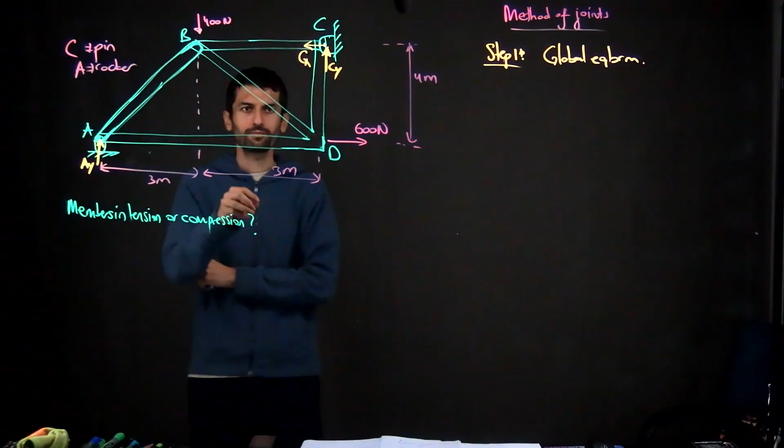Okay, so we have a similar truss problem again. There is a pin at point C and a rocker at point A. The rocker will have a normal reaction force, and the pin will have support reactions in the X and Y directions. And then the question says that...

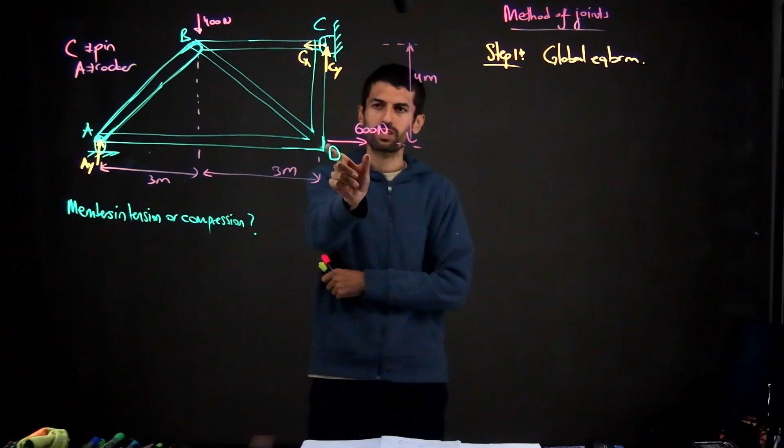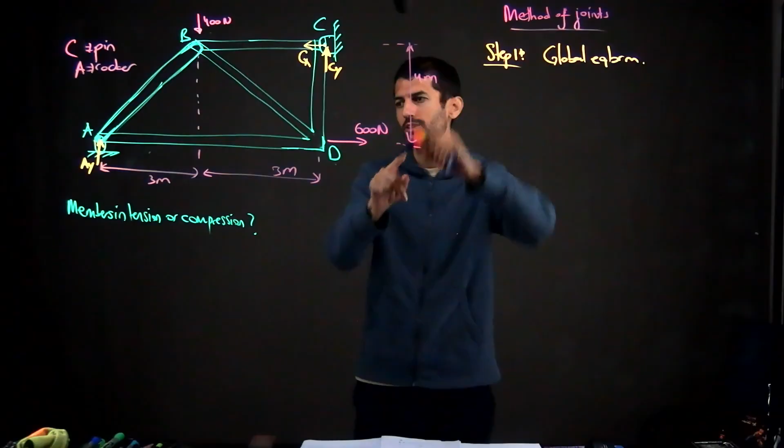Again, what are the members, are each of them in tension or compression. We have an additional force of 600 newtons this way at point D, and then we have 400 newtons load at point B. The length of D to C is 4 meters, the length from A to B is 3 meters, again 3 meters from B to D.

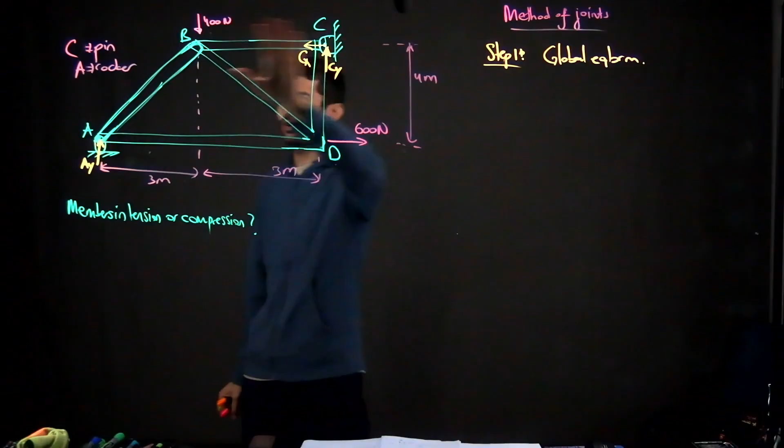So step 1, as always, will be the global equilibrium. We'll write the equilibrium equations for the whole setup, and then we will write the equilibrium equations for each of the joints. Okay, so let's do that.

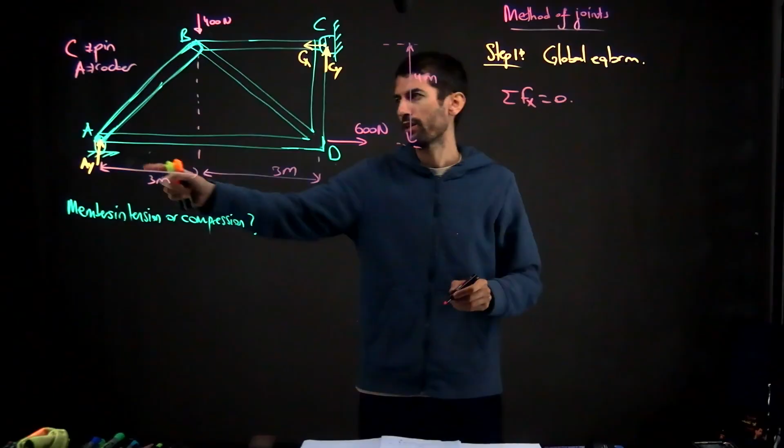So first, the x direction forces. We have x direction force as Cx, which is negative. I will take this direction as positive. And then we have 600. So from here it follows that Cx is 600 newtons.

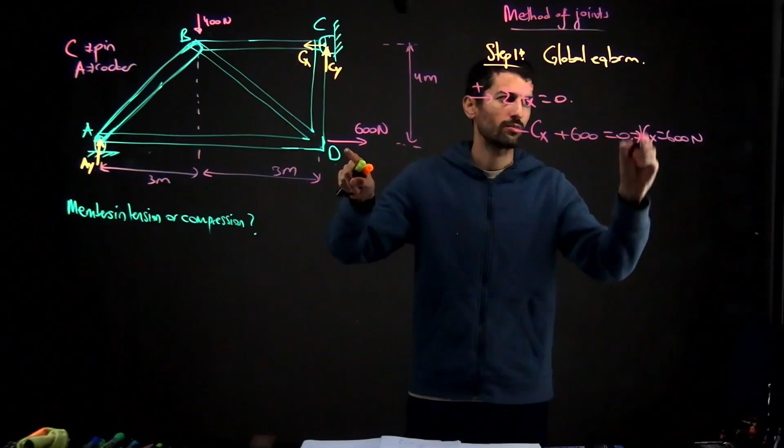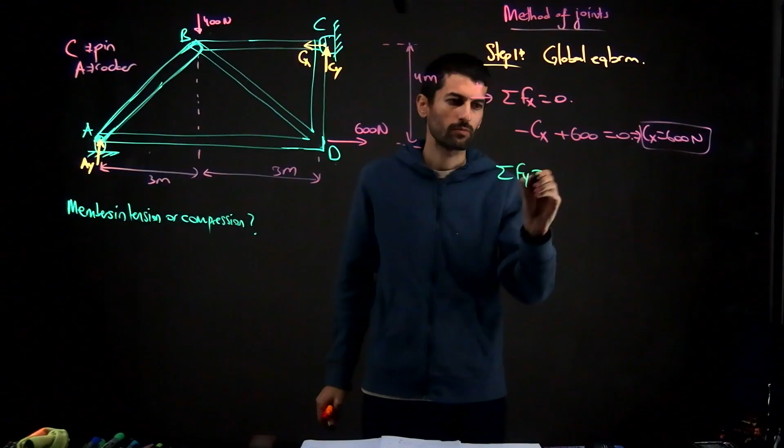And then we have the y direction forces, which is Cy. Sorry, this should be up. As positive, so we have the Cy, we have the Ay, and we have this 400. Okay, and you can see that we have two unknowns but one equation.

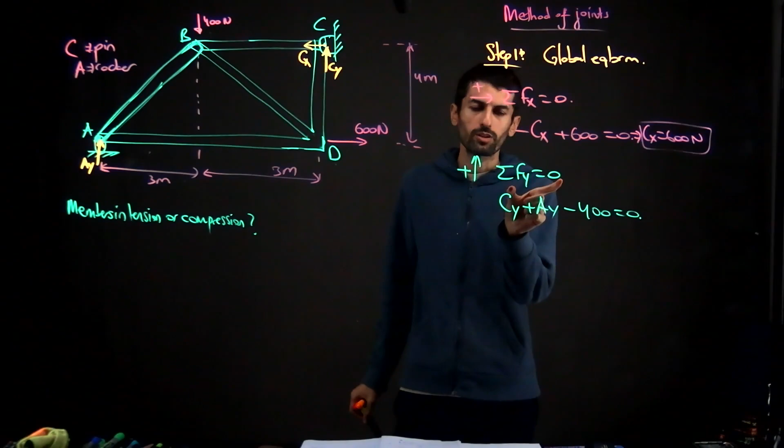So we need one more equation to find these unknowns. So that final equation will come from the equilibrium of rotation. We will say that the moment about any point is 0. So I will choose point A, but you can choose any point. Even you can choose a point outside this truss.

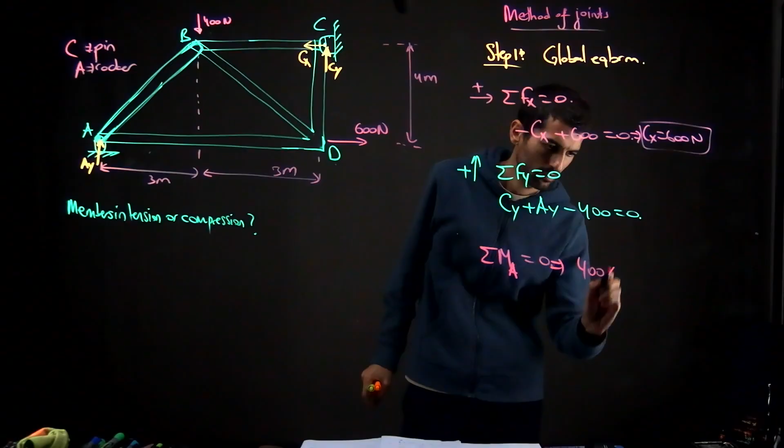So I will say that the moment about A is 0. So it means that this 400 times 3 creates a clockwise moment this way, and negative. This Cx creates a moment this way, which is a counterclockwise moment, times the arm of it, which is 4 meters.

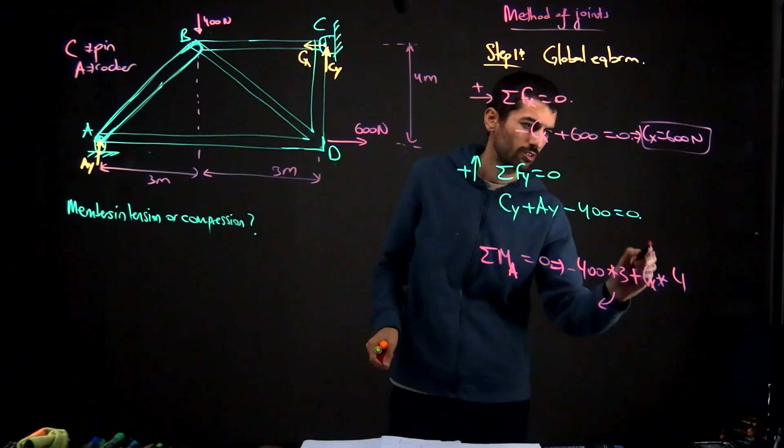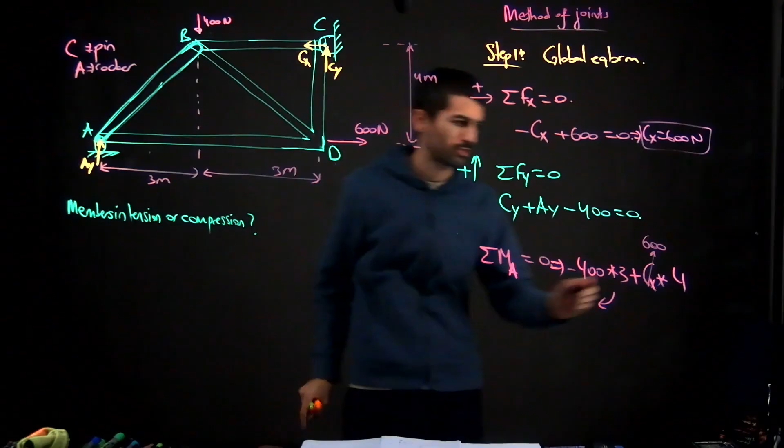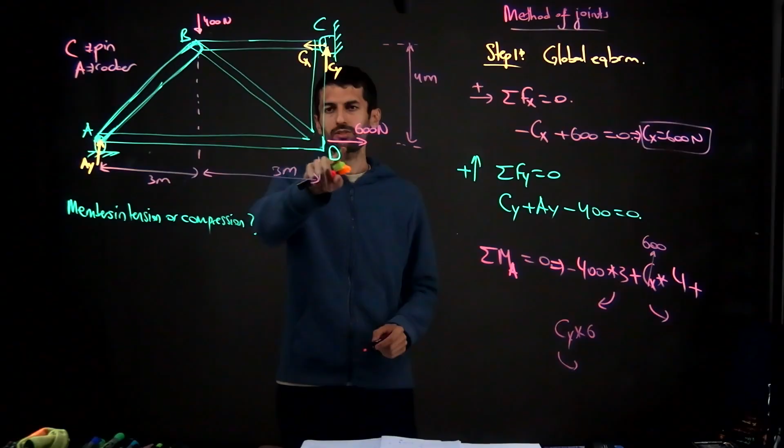Okay, and I know that Cx is 600. And then Cy creates a moment about A, again in counterclockwise sense, with an arm of 6. This one is counterclockwise, Cy times 6, again counterclockwise. And then the 600 passes through point A and it doesn't create any moment. So that will be equal to 0.

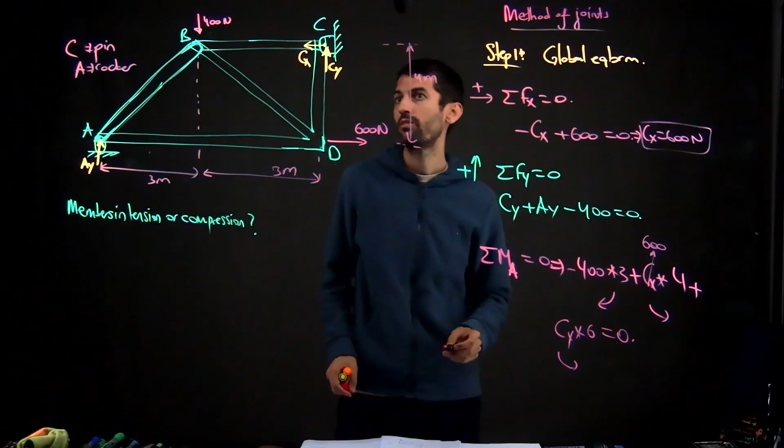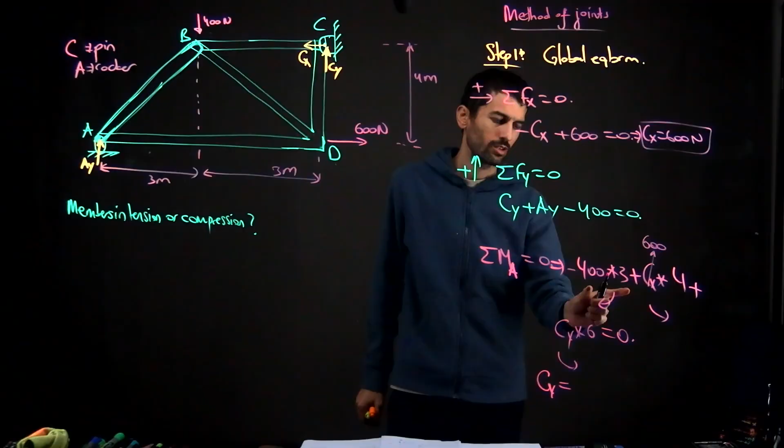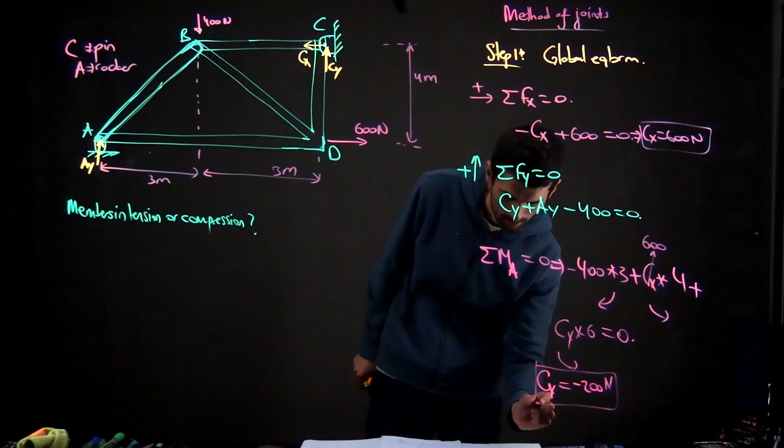So if we solve it, we will see that Cy is equal to... we have 2400 here, 1200 here, so it will be negative 1200, and so negative 200. That's for Cy. Okay, so we have the value for Cy, which is negative 200 newtons.

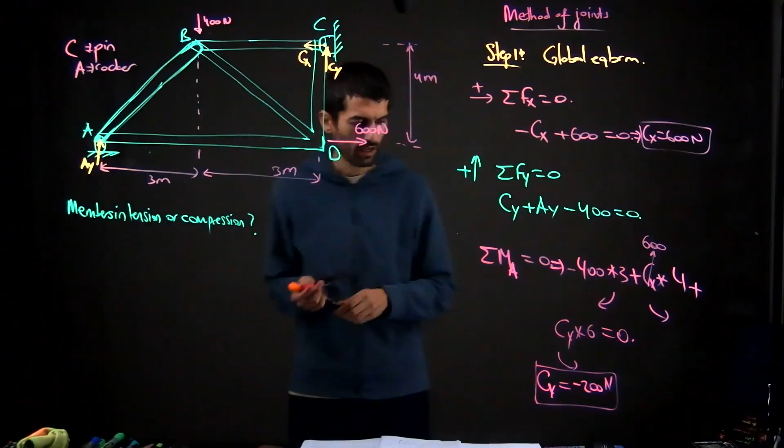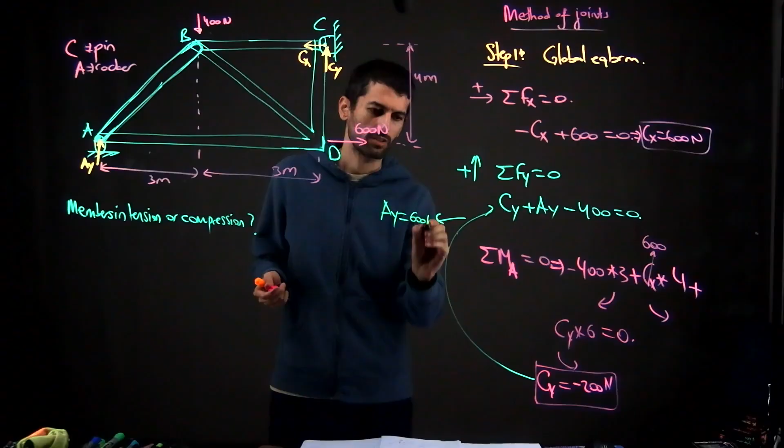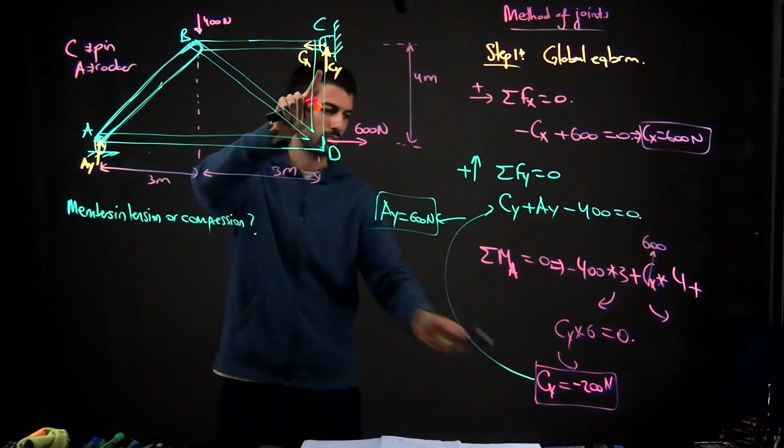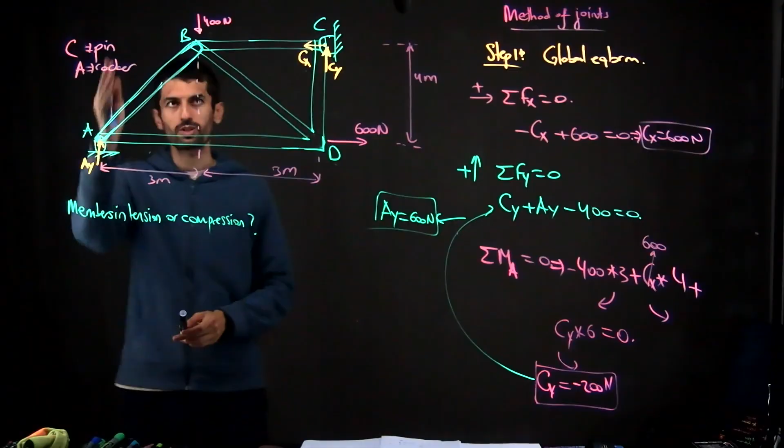Then we can go back and find the value for Ay. From here it follows that Ay is negative 200, negative 400, and 600 newtons. So the result says that the direction for Cx is correct, 600, which balances this force. The direction for Cy should be the opposite, this way, so this balances the moment by 400, and then the direction for Ay is positive, which is up. Again, this balances this 400 and then this Cy force.

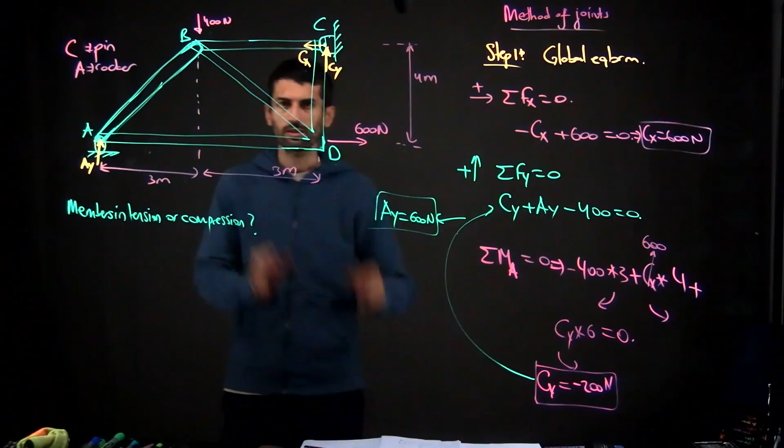Okay, so with this in mind, we finished step 1, and now it's time to move to step 2, which is to write the equilibrium equations for each of these joints. Let me write what we have found. We said that Cx is 600 newtons, Cy is negative 200 newtons, and Ay is 600 newtons.

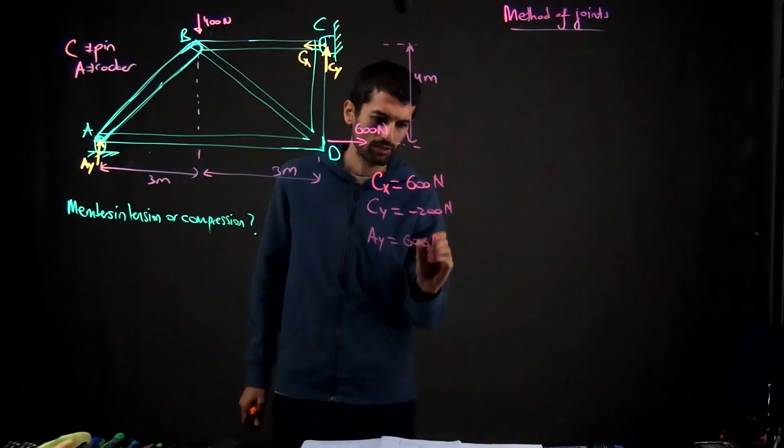Okay, so now I will start from joint A, and then B, and then C, and then D. So let's firstly go with joint A. There is a reaction force of 600 newtons. There is a force, again I will assume it is tensile force, called FAD. And there is a force, again I will assume a tensile force, called FAB. And this FAB has an angle here.

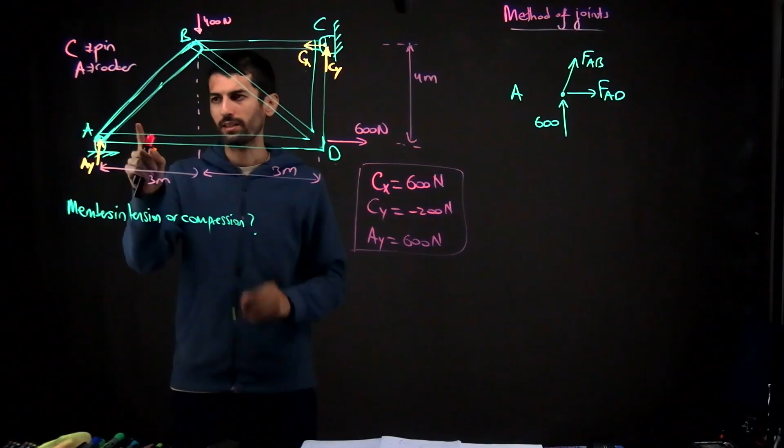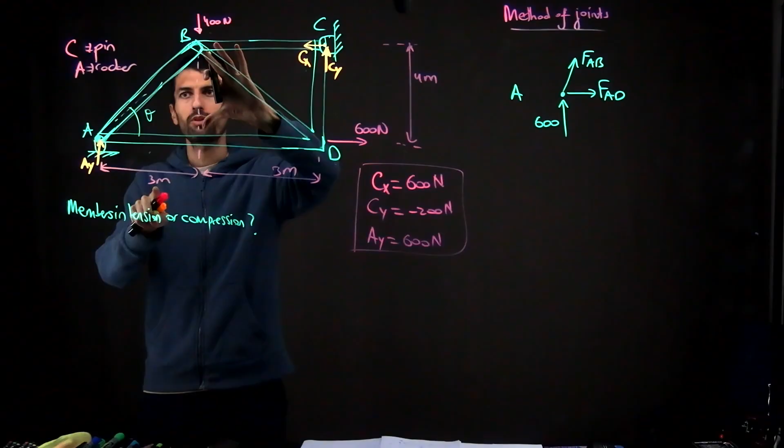This one is theta angle, and I know that this theta angle can be found by 3 meters, this one is 4, and this will be 5. A 3, 4, 5 triangle. Okay, so I can easily find it, and this theta, it will be just 3, 4, and 5, and then this will be the theta.

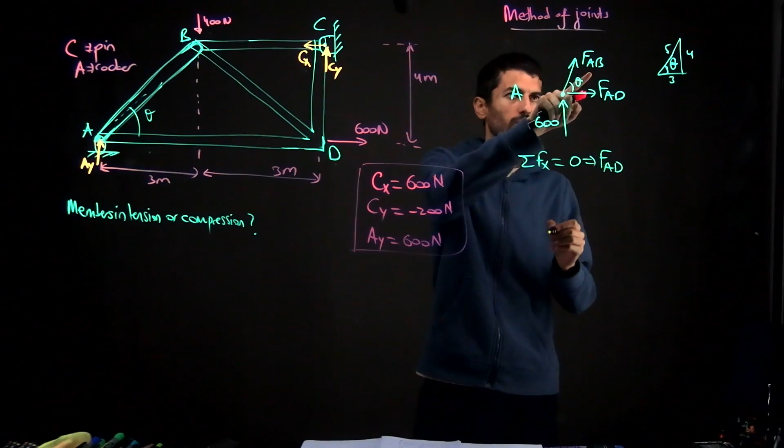Okay, so we have two unknowns, essentially two equations, so we can find the unknown ones. So I will say this one is for joint A, so this will be 0. We have the force of FAD, which is positive, and the cosine component of FAB, which is again positive. The cosine is 3 by 5, and that will be equal to 0.

Similarly, the y will be equal to 0: 600, again this one is positive, but the sine component now comes, so we'll have the FAB, sine of theta is 4 by 5, that will be 0. Okay, and then if you solve it, we will have that FAB is negative 600 times 5 by 4. That will be negative 750 newtons.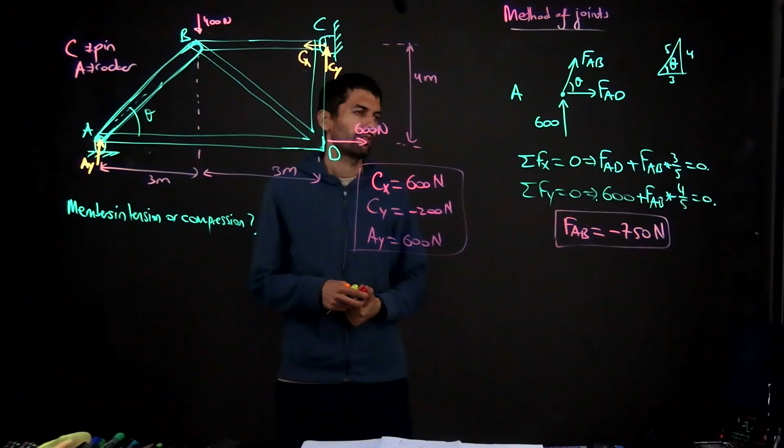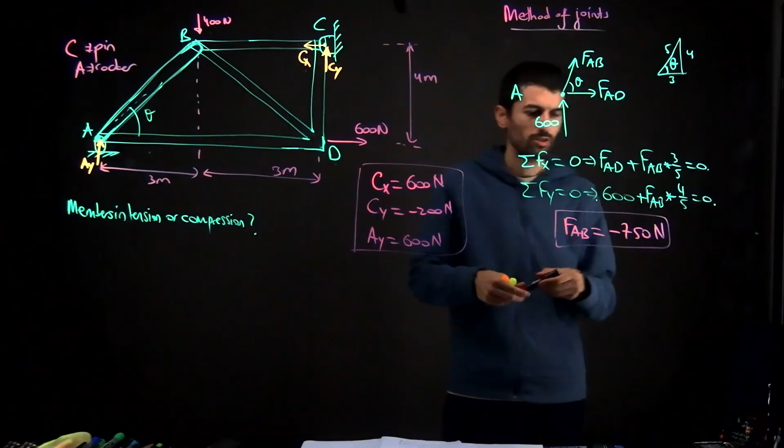That is FAB. And then we will have FAD. So this one, 3 by 5, that will be our FAD value. So this one divided by 5 makes 150, times 3 is 450. So it becomes that FAD is 450 newtons.

Okay, so the result says that the direction for FAD is correct, this way, 450, but the direction for FAB is negative, so it should be that way. It is, in other words, a compressive force acting on joint A. That force, so it will be that FAB is negative 750 newtons and FAD is 450 newtons.

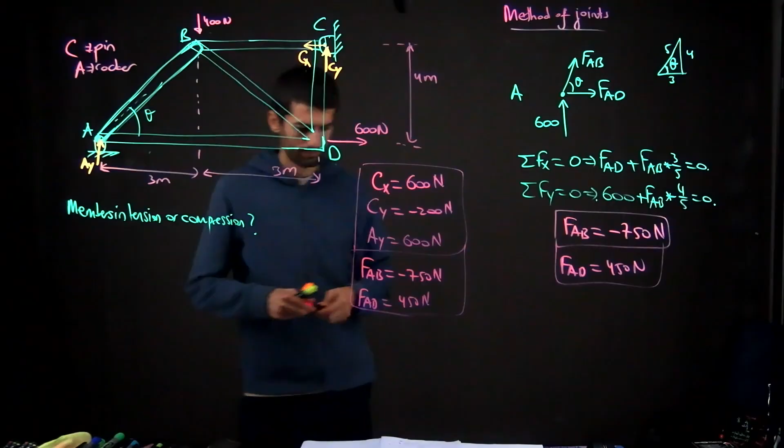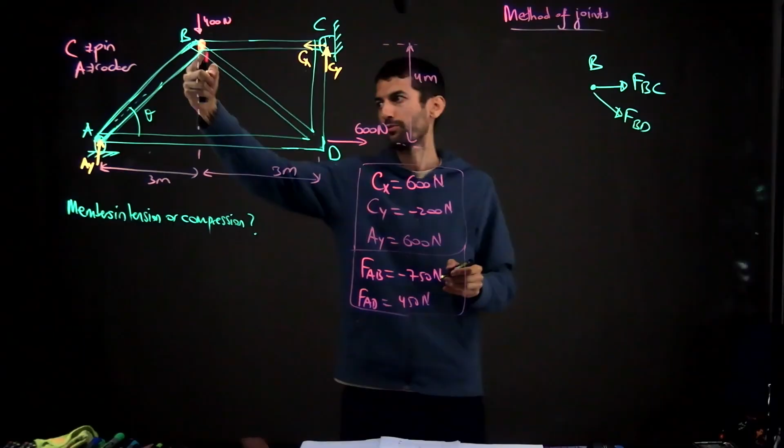Now I will move on to joint B. For joint B, we have a force BC, we have a force BD, and we have a force AB.

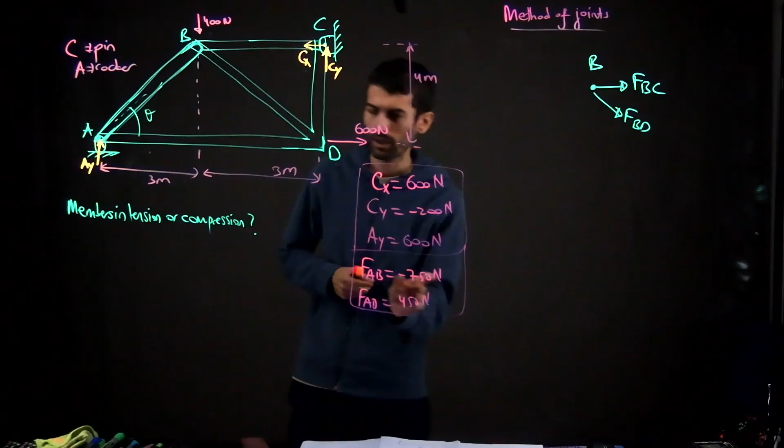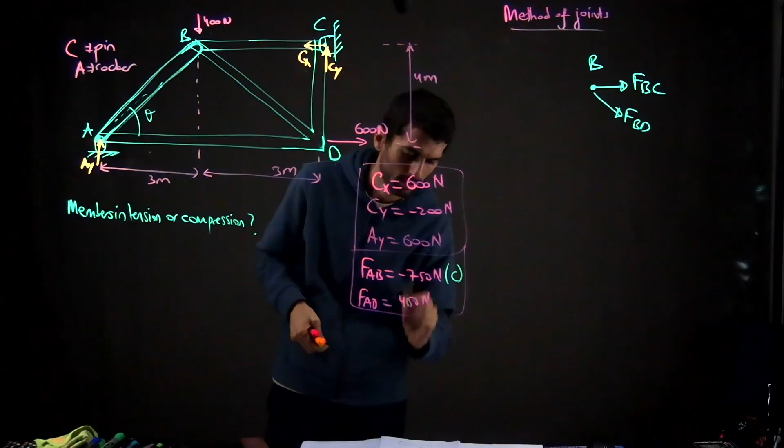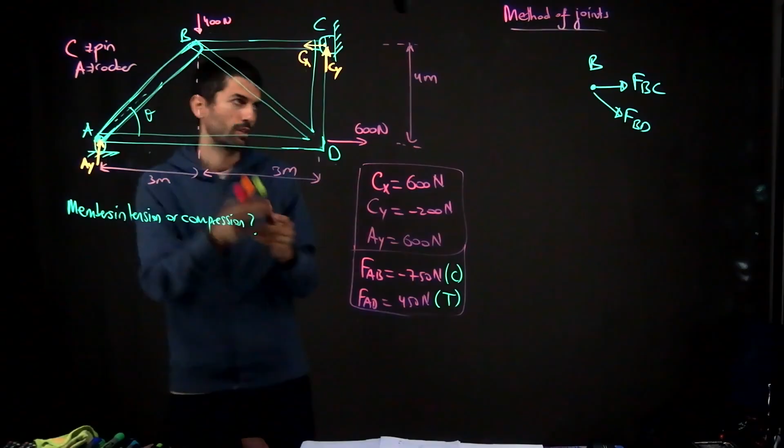And for AB, we have found that the force is not this way, but the force is that way. Okay, so since it is negative, I will put it here as compression, positive tensile. And since this one compresses A, the equal and opposite one should compress B. So I will just call this one FAB. Again, Newton's third law.

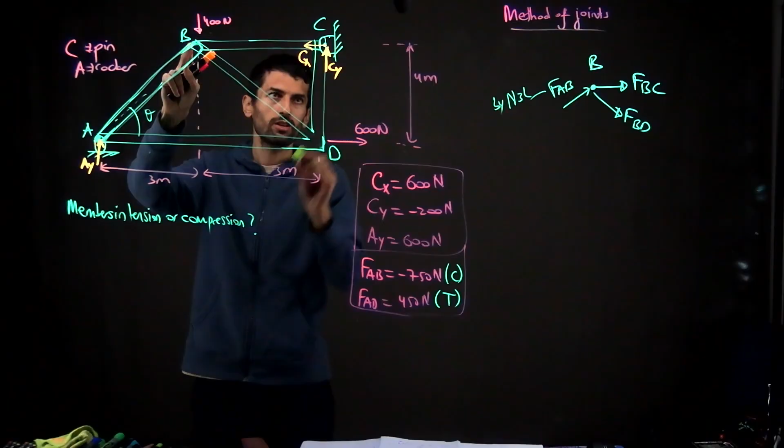For B to D, we have again 3, 4, and 5. So this is B to D, this part is 4, this part is 3, that part is 5, and that is the angle theta, same angle theta here.

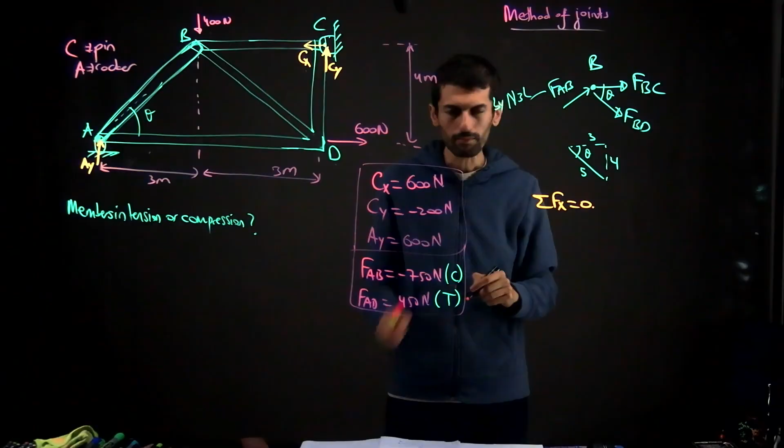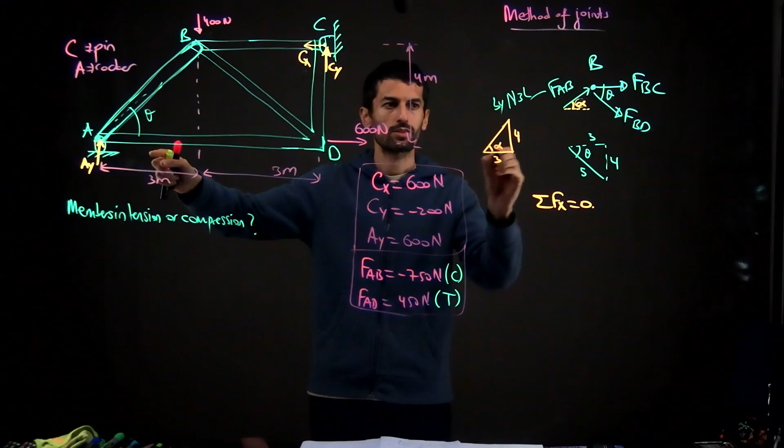Okay, let's write the forces. First the x components will be 0. The angle for FAB was theta here, so let's call it a different angle, alpha. For FAB, we had this one as 3, this one as 4, and this one as alpha. This one is for AB, and this one is for BD.

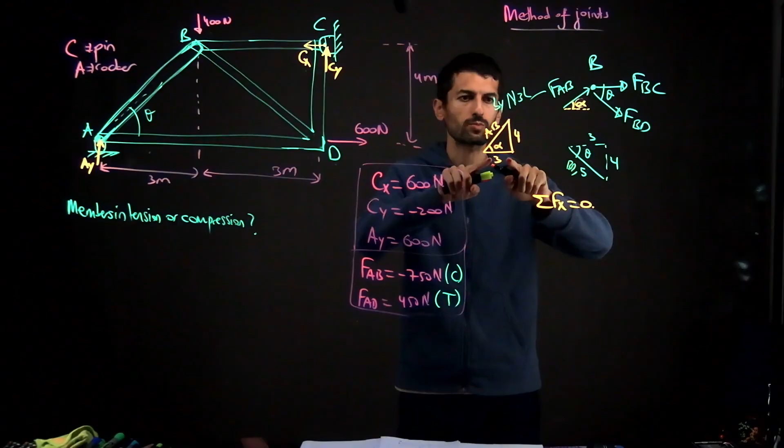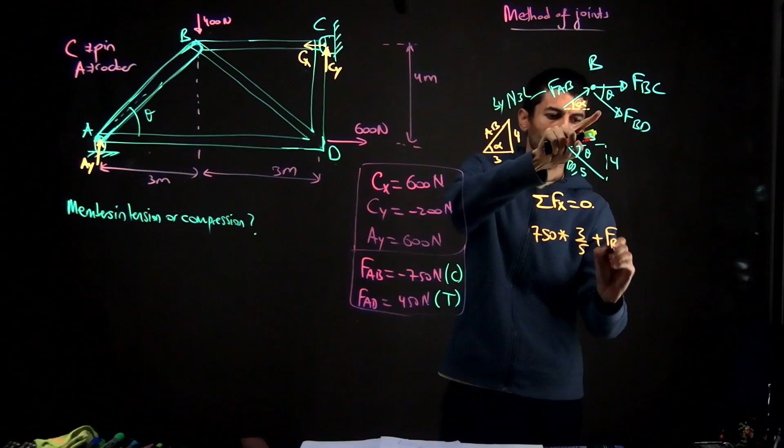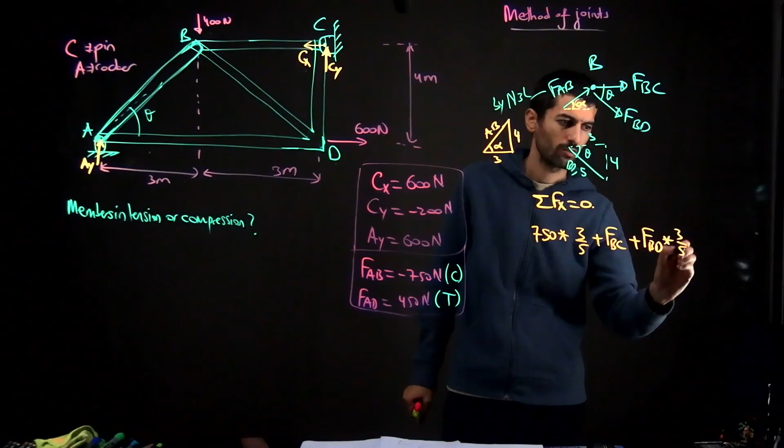X component of FAB is positive. FAB is 750, and its x component will be cosine of the angle, which is 3 by 5, plus FBC, plus FBD as a cosine component, which is positive again, so FBD cosine of theta is 3 by 5 again.

Now comes the y component, so we have two unknowns. For the y component, we have FBD and FAB only.

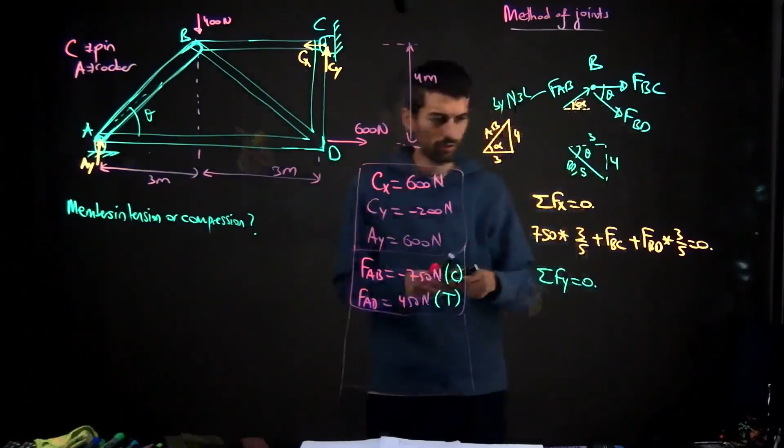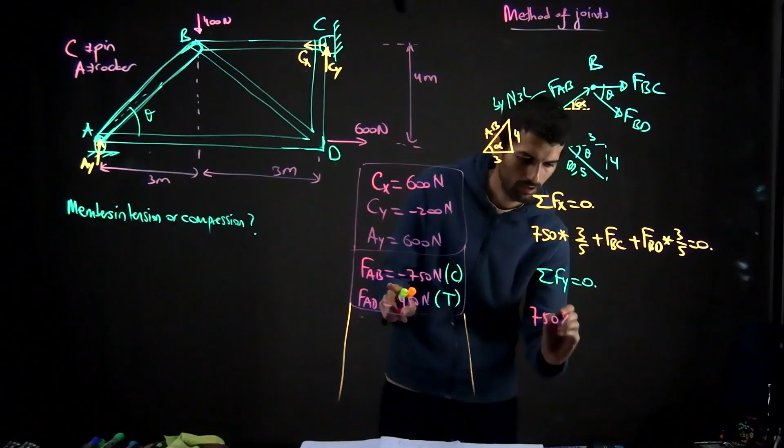For the y component forces, we will have FAB y component, 750 times the sine of the angle, which is 4 by 5, and then FBD y component, which is negative, again the sine of it, 4 by 5, and then negative 400 is equal to 0.

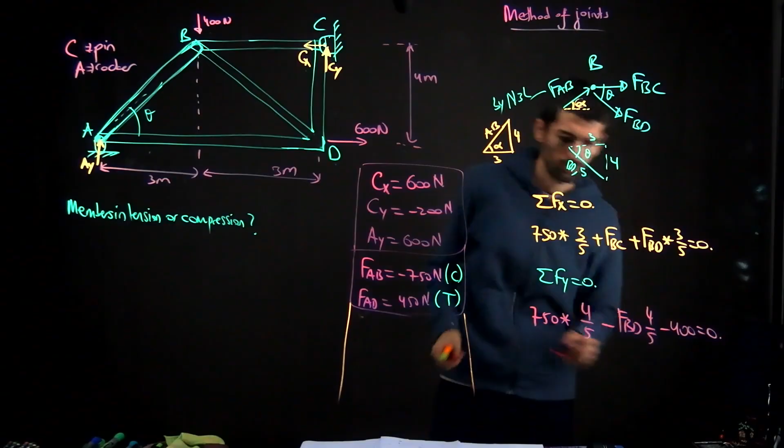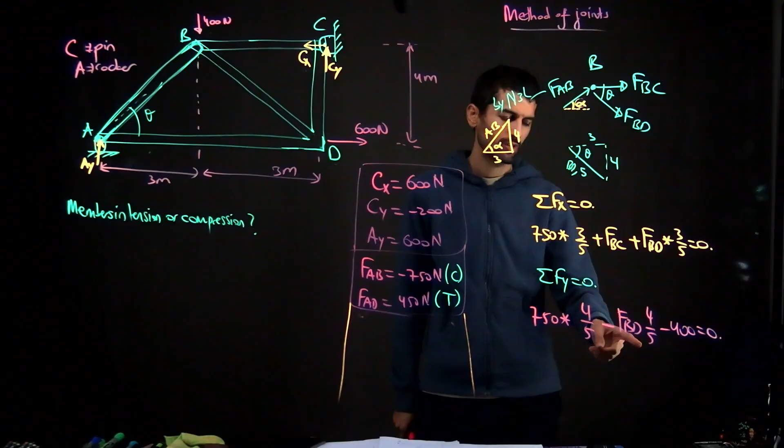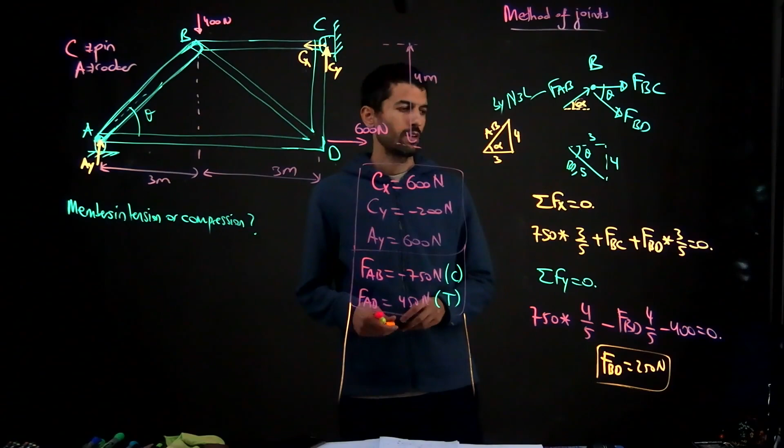So we have 750 by 5 equals 150, times 4 equals 600, minus 400 equals 200, times 5 by 4 equals 250. From here, FBD is 250 newtons. If I replace back, 250 by 5 equals 50, times 3 equals 150, times 3 equals 450, and then we have 600, so FBC will be negative 600.

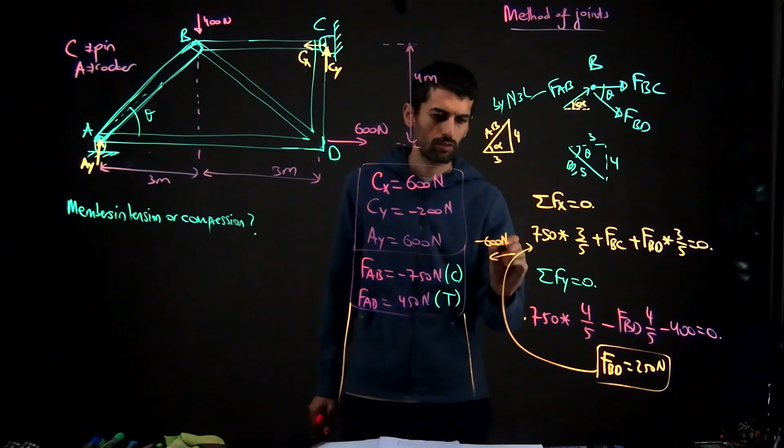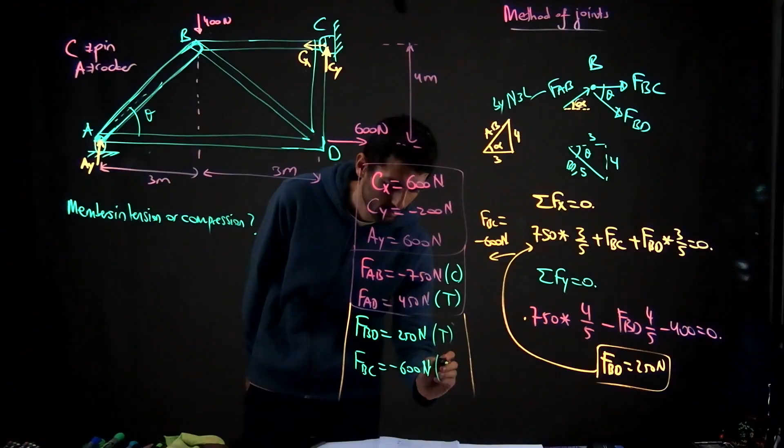So FBD will be 250 newtons, FBC will be negative 600 newtons. This one is a tensile member force, this one is a compressive force because the direction is negative. So FBC, we assumed it that way, so it comes out this way. So we have A, B, and then time to find C, and then D.

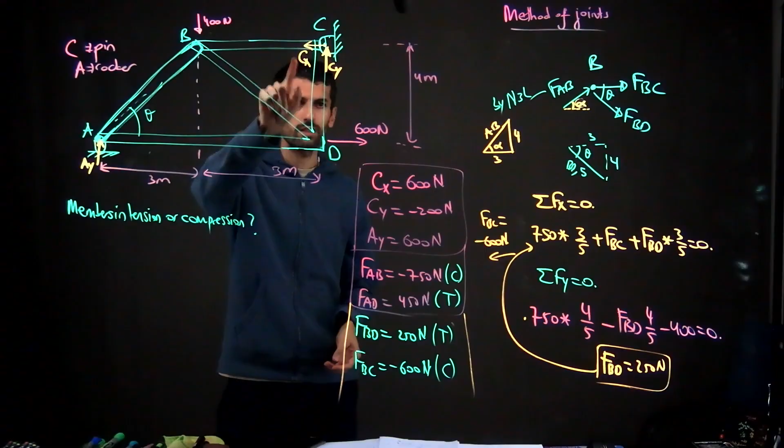Time comes for joint C. C will have a CY, which is negative 200. I will put this one this way. CX, which is positive. And then there is BC, which is negative, so this one is BC, which is 600. And there is CD.

So 600, 600, this one is in equilibrium, and this one CD, and then by the sum of F y equal to 0, it follows that FCD is negative 200 newtons. So again, this one is a compressive force.

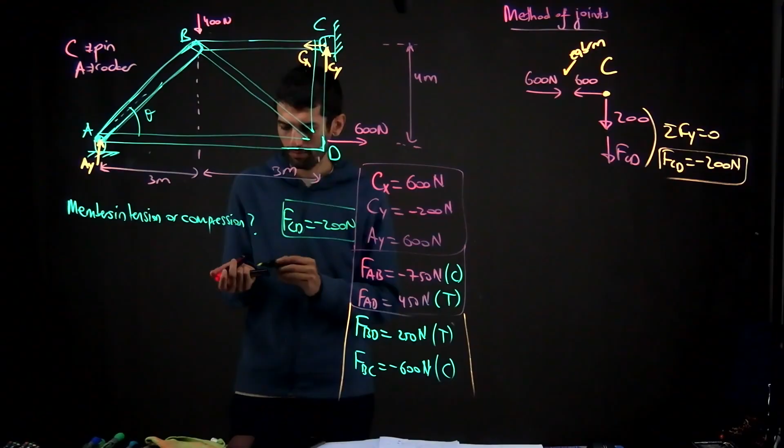If I come back to point D, for D I know BD from this part, I know CD that I just found, and I know AD from here. You can write D and check if it is true or not, but I will not do that for our case. You can do the same for joint D to check if it is true or not.

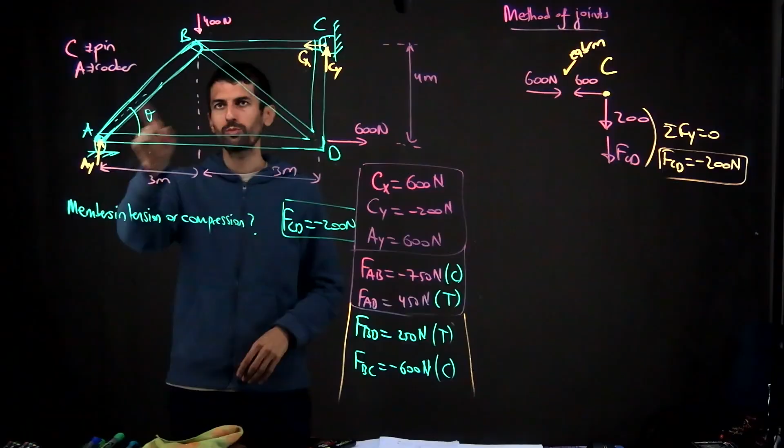For our case, I will finish the problem and determine if the members are in tension or compression. So let's find if the members are in tension or compression.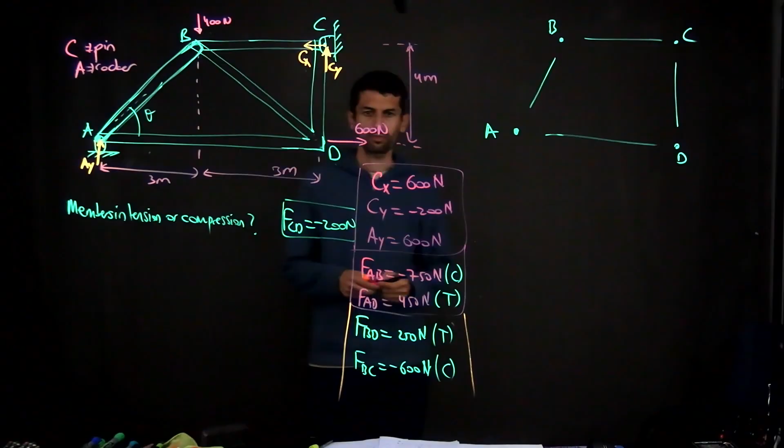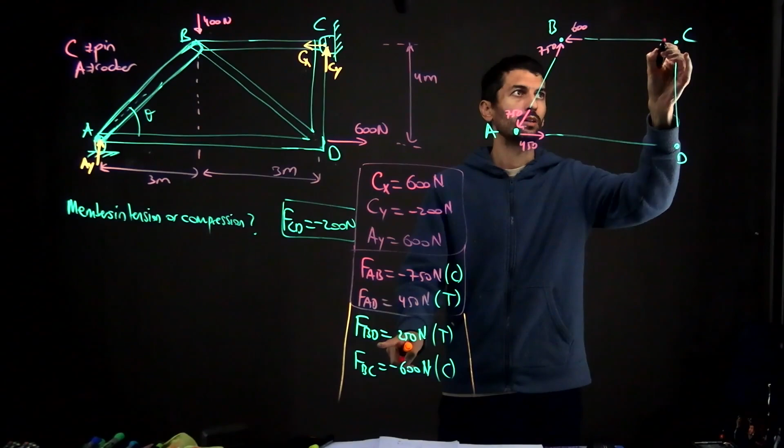First, AB, we found that this one is negative 750, so this will be 750. And A to D was positive, so this one is 450. And then B to A, it will be the opposite by Newton's third law. And BC was negative, so again this will be 600. This one will again be by Newton's third law, equal and opposite. And then CD, which was negative, again 200 and 200, 450, 450.

So we will have equal but opposite forces. You can check: equal and opposite, equal and opposite, equal and opposite, equal and opposite. But these are for joints.

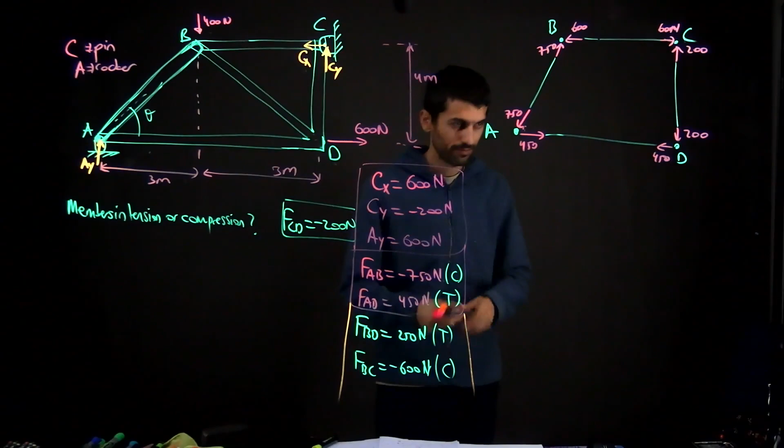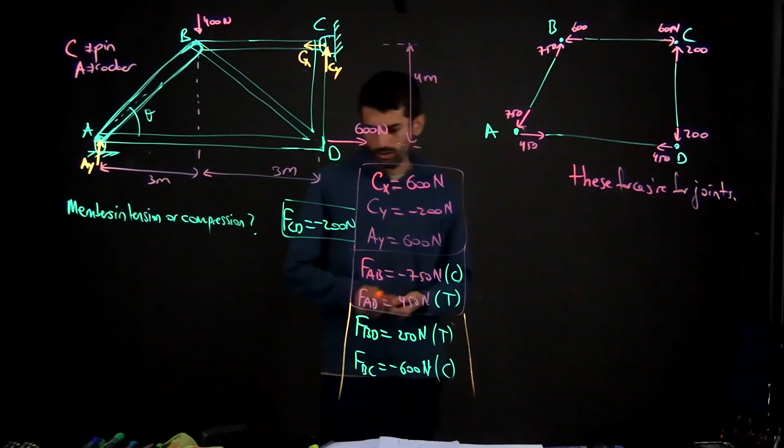So we have to write the forces for the members, to find if the members are in tension or compression. For this one, 750, you will have equal and opposite, equal and opposite. So this means AB is in compression.

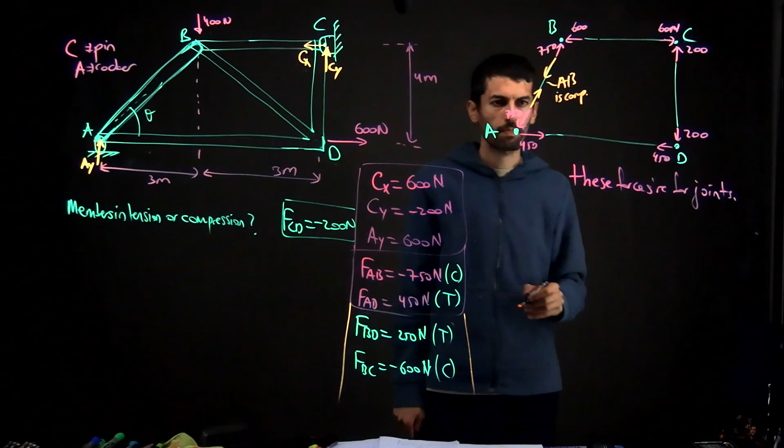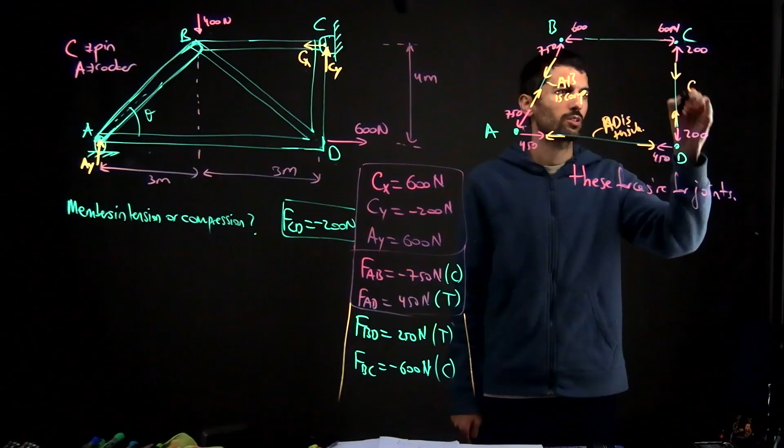450, equal and opposite, equal and opposite, so AD is tensile. Here, equal and opposite, equal and opposite, CD is compressive. Here, equal and opposite, equal and opposite, BC is compressive. So we have compressive, compressive, compressive, and tensile member.

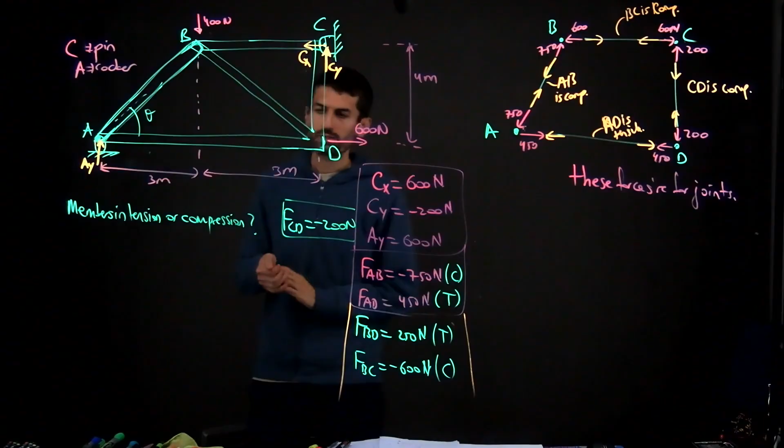So this finishes the problem. To summarize the steps: first we do the global equilibrium equations for the whole truss, then we write the equilibrium equations for each joint, and we found the forces for joint A, joint B, joint C, and joint D. Then by Newton's third law, this will have an opposite force at each point, so we have AD is in tension.